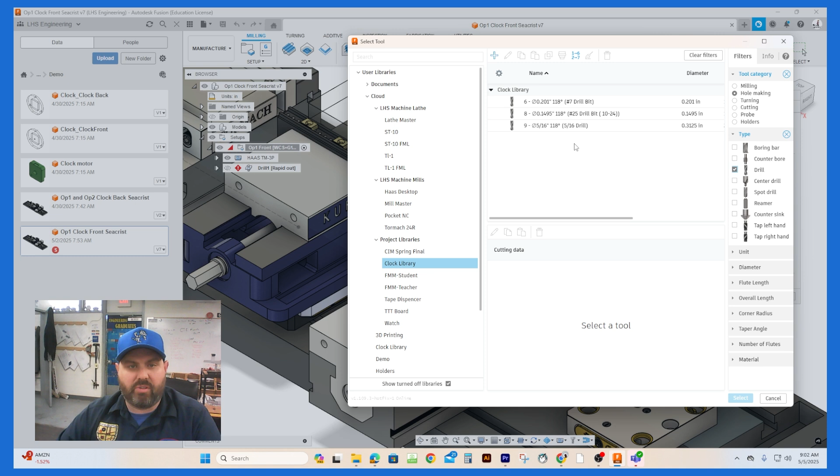But if we had a large library, we could actually use filters here on the right to limit ourselves to only the drills, and that would limit us down to the 3 drilling drill bits. For this center hole, we are actually going to use the 5/16 drill bit, tool number 9. So we go ahead and hit select. Notice it's acrylic plastic at 4,000 RPMs. If there were more listed here, we'd have to make sure we choose the correct material that we are cutting, but we only have acrylic for this one.

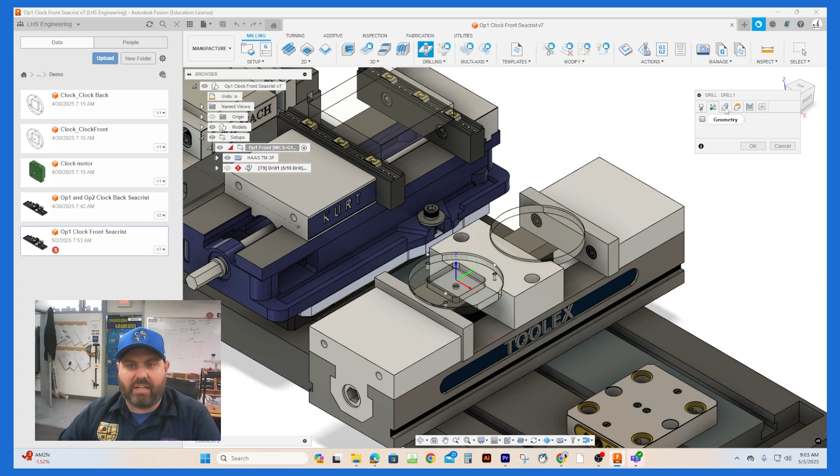The second tab we do not need to work with because we're not doing multi-axis. The third tab is geometry, so we need to select the hole we want to drill. I'm going to zoom in and grab that hole, so it now knows where I want to do the hole. I don't need to click any of these other icons for this one hole we're drilling.

Heights, now this does matter, because right now it is going to start drilling at the top of the hole, which is already way down inside the material. We want it to start drilling at the top of the stock, so we are going to switch from top of hole to top of stock, and you can notice that this gets longer. Then bottom of hole, and then we are going to hit drill through.

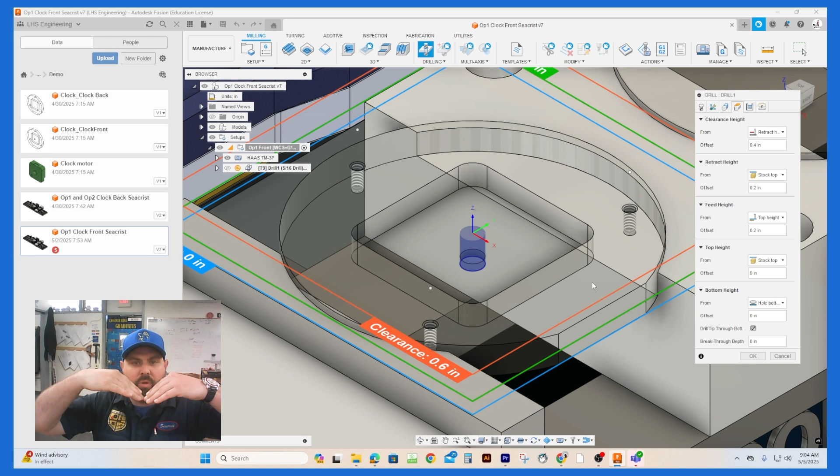Tip through. The drill tip is actually angled like a V, and so it'll stop at the bottom of the tip. We want that whole V to go all the way through, so that's what drill tip through the bottom will do. If we look here on the side, you can see that the drill is coming all the way down through the bottom.

Then we're going to go ahead and go over to cycle. We're going to rapid in, rapid out, we're not drilling that deep. And linking parameters, we don't need to adjust at all. So we're going to go ahead and click OK.

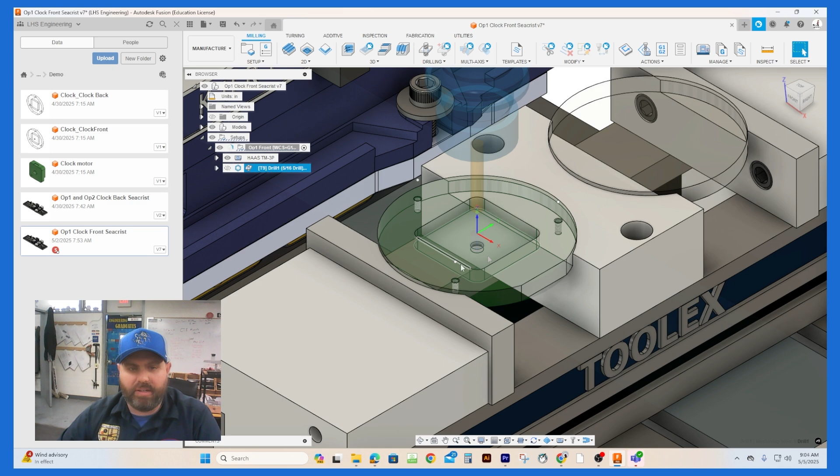We're going to see that it's going to take a second to process. It's processing right here, and once it's processed, we can go ahead. Now that we're done, we can go ahead and hit simulate. We're going to hit play, and we're going to see the drill bit come over, come down, drill the hole, and come back up. So we can exit the simulation, and we've now done our first command, which is drilling.

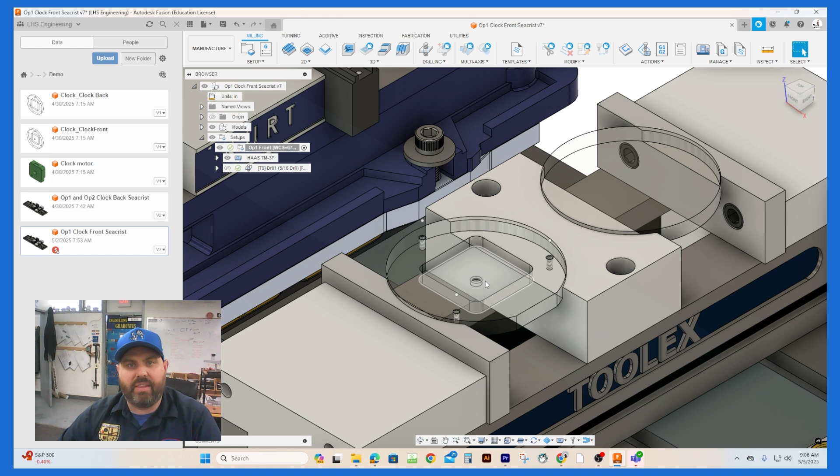Our second command is we are going to remove all the material from this square, and there are 2 things we have to understand. We are going to try to remove the material as fast as possible with no care for how the finished bottom looks or the sides. So what we're going to do is remove everything but 20 thousandths on the floor and 20 thousandths on the sides, and then we're going to come back and clean both those operations up.

So adaptive clearing, let me close this so you can see the titles. This is adaptive clearing. This is what is used to remove a large amount of material.

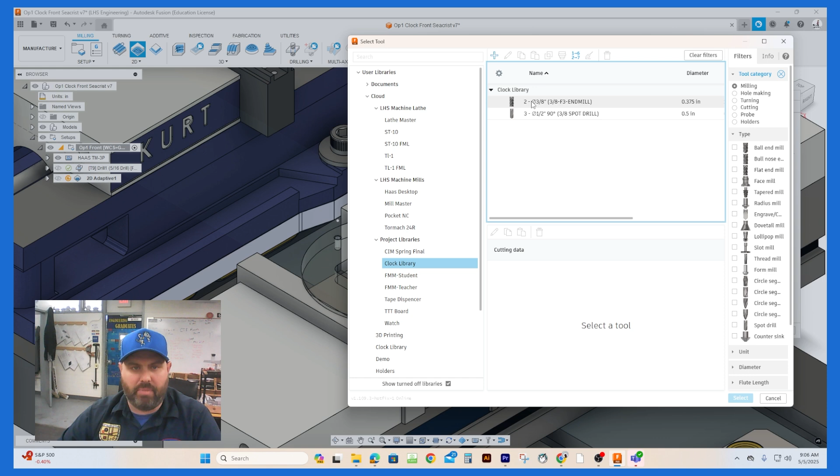So we go ahead and click on that. We're going to select our tool just like we did before. This time we are going to use an end mill, specifically tool number 2, the 3/8 end mill, in acrylic plastic, and we're going to hit select.

We do not need to work with multi-axis. We're going to go to geometry and select this ring at the bottom of our pocket, and it's going to highlight everything in blue, meaning it's going to cut everything out. We're going to go here, we don't need to change any heights. We told it how deep by selecting the ring at the bottom.

Passes, we are not going to change anything. We're going to leave the material to be left on the walls and the floor at 20 thousandths, and our optimal load at 15. Under linking parameters, we don't need to change anything. So we're going to go ahead and click OK.

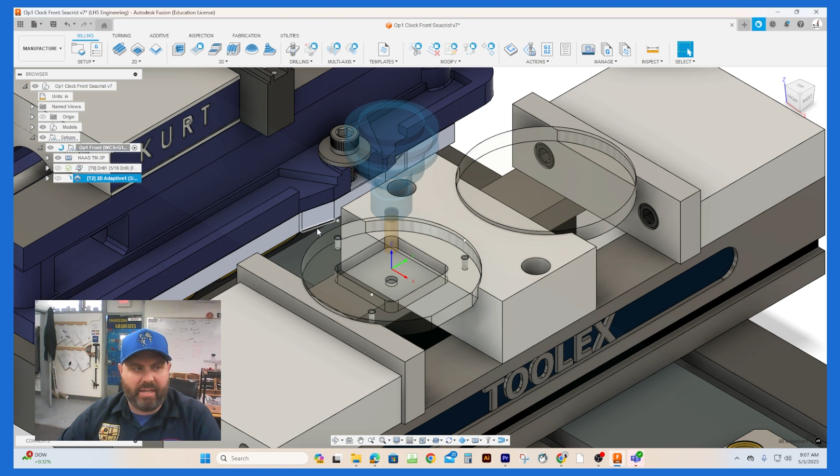And it's going to take a moment to think. And there is the process. It's going to spiral in to the bottom and then start moving its way out, cutting away all the material, but leaving a little bit on the bottom and a little bit on the walls.

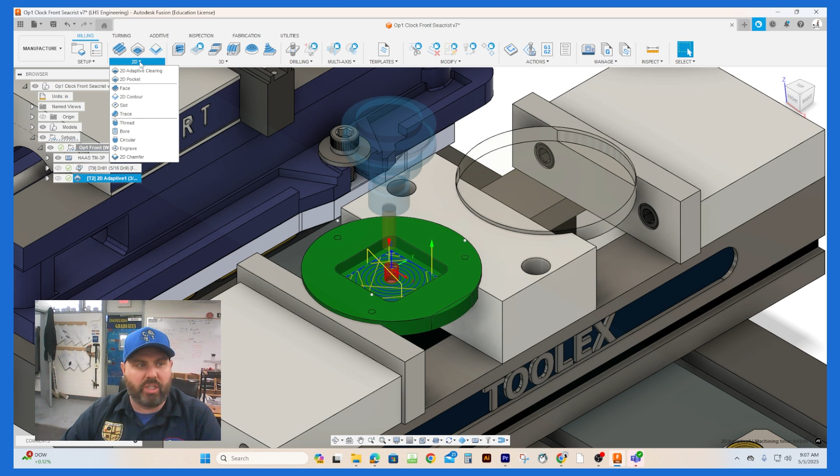Now that we have the material out quickly, we're going to go back and clean up the bottom and clean up the walls to the exact size we want. And to do that, we are going to use a pocket, specifically a 2D pocket.

So we're going to click on 2D. In the window, you notice that the number 2 tool, the 3/8 flat mill, was automatically populated in here. It always defaults to the last tool we used for a similar operation.

So before we started with the drill and then went to an end mill, you can't adaptive clear with the drill, so we had to select a tool. But now it will stay on this 3/8 end mill until we do something that requires us to not use the 3/8 end mill. So we don't need to adjust this.

We don't need multi-axis, so we're going to skip over to geometry. We're going to select the exact same geometry as before. And then we're going to move on to heights. Once again, we're changing none of the heights because the geometry we selected is already on the bottom where we want the floor of our pocket to be.

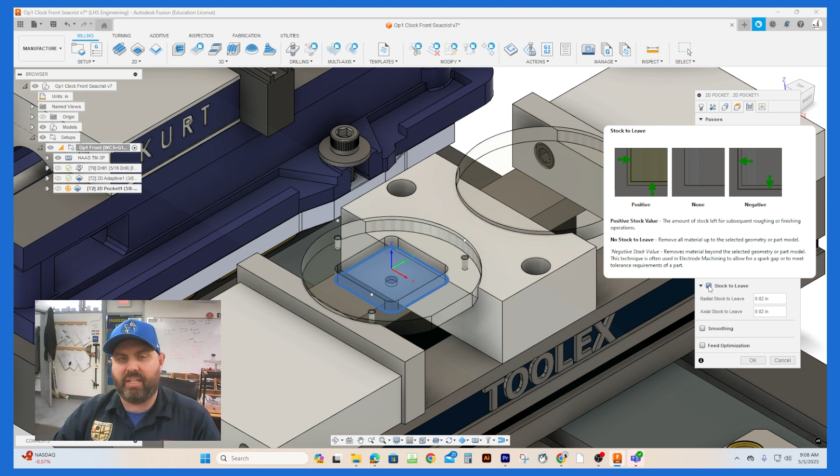Under passes, there's nothing to do here other than to check turn off stock to leave. We did that—we wanted stock to leave in the adaptive clearing. Now we want to cut to the finished size. So we're going to click there.

And then the only other thing we're going to change is on this ramping. We do not need to run it at a degree of 2. We already cut all the material out, so we can come down at a much faster rate. So what we're going to do is change this to a degree of 10, and the spiral in will be much more aggressive, which is fine because the material has already been removed.

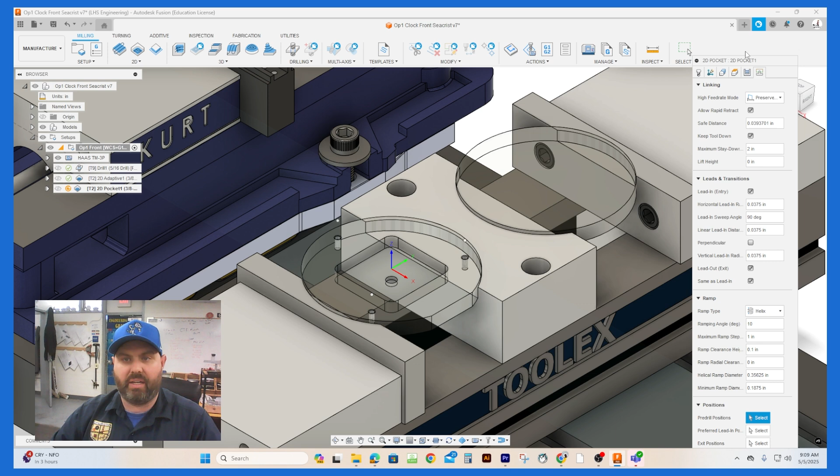And if we just slide this up a bit, we can go ahead and hit OK. And you're going to notice that red spiral is a much higher helix, and it's going to cut to the final size. So now that we have 3 operations set, we're going to simulate again.

This time we're going to click on the very top. That will allow us to select everything. We're going to hit simulate again.

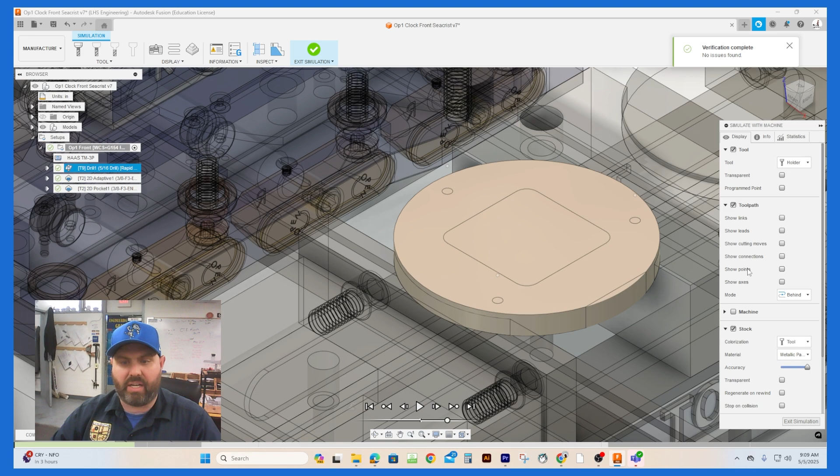Here it is. I've turned the machine off. If I moved it to here and zoomed out a little bit, I can turn the machine back on and see it. And we're going to go ahead and hit play.

And if I zoom out a little bit, it's going to start with the drilling operation. And then it's going to switch tools to the 3/8 end mill, and it's going to spiral in and open up the pocket, leaving material on both the floor and on each wall, 20 thousandths to be specific. And then it's going to switch, and cut the 20 thousandths off the bottom and finish the walls exactly to size.

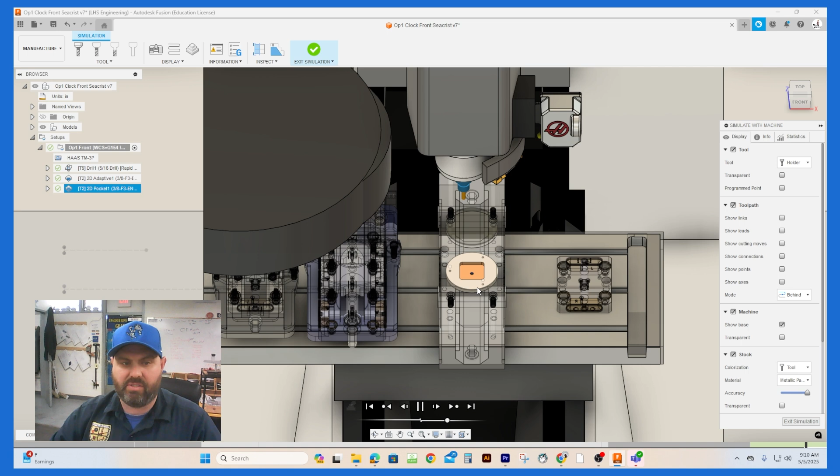And then we're going to exit the simulation because we're not quite done. We still need to do 3 more things. Let's go ahead and click somewhere else to get rid of the machine.

We need to cut this flat on the bottom, and then we need to drill these holes and then tap these holes. So we're going to start with the flat on the bottom. This is also going to be done with the 3/8 end mill.

So let's go ahead and go to contour. Contour means we're going to use the side of the cutter to cut along a flat like this. It is automatically defaulted back to the 3/8 end mill, so we don't need to change that. Multi-axis we skip. Geometry is our next step.

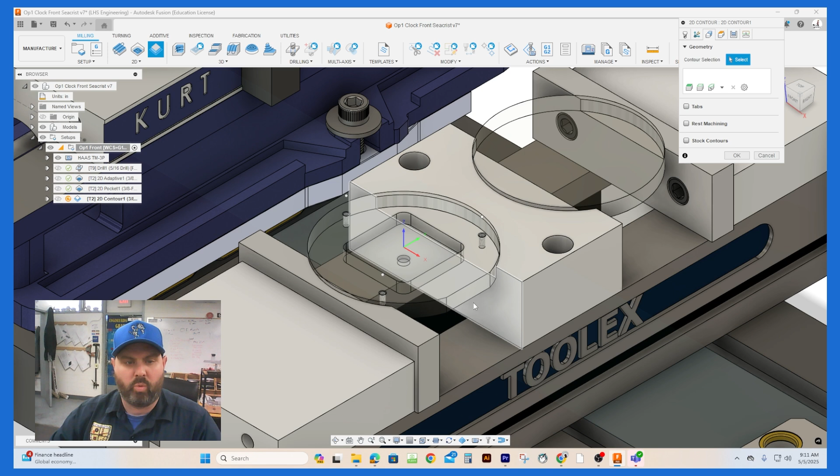We are going to click on this ring on the bottom. Now, we do not want to go all the way around like it has it right now. That means it would cut through our jaws and our piece would become loose. All we want to do is cut this single line.

And to do that, we are actually going to double click on closed chain number 1. And we get this chain box. We are going to switch from closed chain to open chain, and that is going to select only one line.

Now this red arrow is very important. It should be on the outside because it basically means the cutter is going to cut on that side of the line. If you click it, it switches to the inside, and it'll cut on that side of the line, which is not what we want. So I'm going to click it again, move it back to where we want. I'm going to click OK.

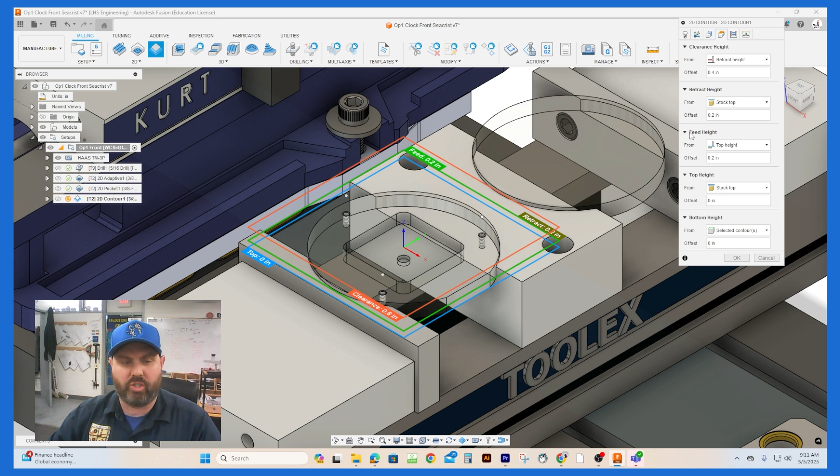I'm going to my 3rd tab. Now on this tab, we do have one adjustment to make. We have selected the bottom edge of this plastic. We want to actually move the cutter so the very bottom of the cutter is going to run along that edge. It can leave a little bit of material behind if our settings are not perfectly correct.

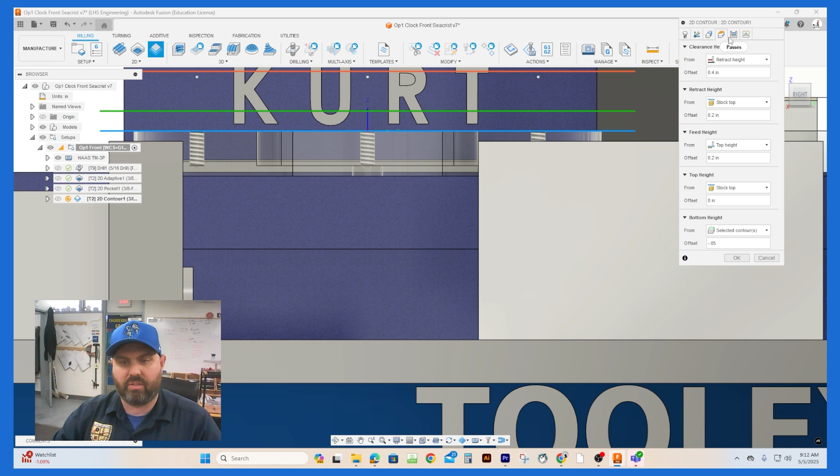So what we're actually going to do is we're going to tell the cutter to actually go down below that edge by about 50 thousandths so that we're using the side of the cutter and we make sure we get a nice clean edge. So under offsets here, we are going to select -0.05, and you're going to click on to the next tab, which there are no adjustments, and then on to the last tab, which there are no adjustments, and I'm going to click OK.

And if we kind of come up, you're going to see that the blue line is below the side of our part. And if we look from above, we can see our lead in to cut that flat and our lead out.

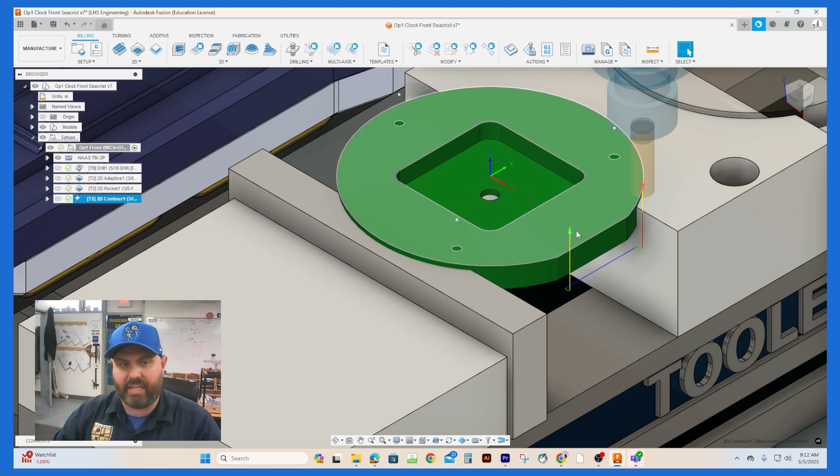We're now down to 2 more steps. We've got to drill this hole and then these 3 holes, and we also need to tap these 3 holes. So let's move on. We're going to do drilling.

And this time we do need to change the tool because we're going to be drilling with a number 25 drill bit, I believe. So we're going to go back to our tool library. And we are looking for the number 25 drill bit, the 10-24. So this is the pilot hole that you need so that you can then tap to a 10-24.

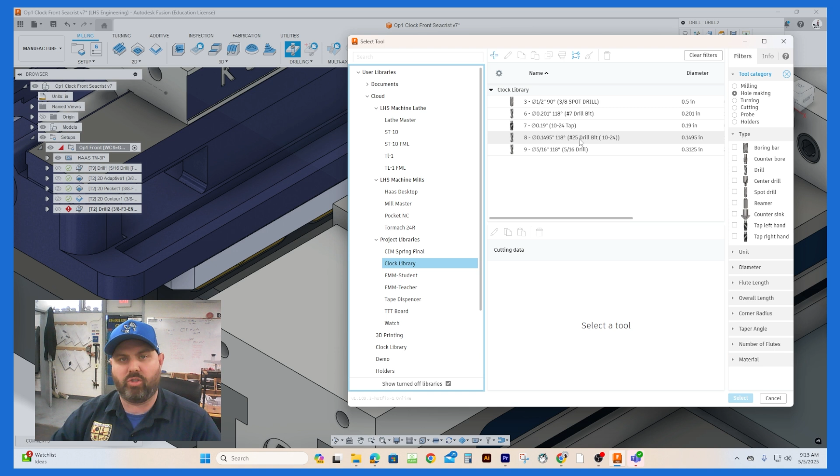So we're going to click on the number 25 drill bit. It's also in acrylic, so we're fine there. And we're going to select OK.

Skipping the multi-axis tab, we're going to go to geometry, and we're going to pick one of the holes. Now, we have 3 holes to do. We can select all 3. That's not a big deal. But we can also hit select same diameters.

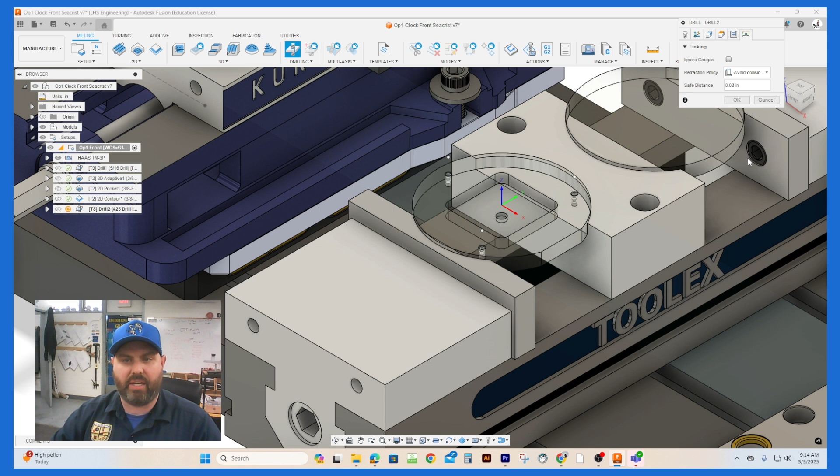Moving over to heights, we are not going to adjust anything other than the top of the hole. We're going to go to the top of the stock. And then under rapids and these things, none of these need to be changed, so we just go ahead and click OK. And you're going to see that it runs around and drills those 3 holes.

Our last step is we need to tap these 3 holes, so we have to make the spiral for the screws to screw into with a tap. So this is fundamentally a drilling operation, so we're going to click drill.

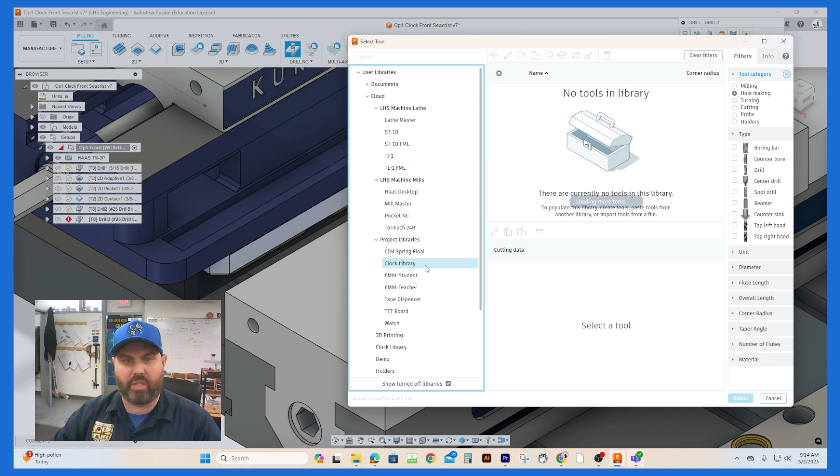We're going to switch to the tap. There is only one tap in our tool library, which is the number 7 10-24 tap. It runs at 500 RPMs because it has to match speed and up and down movements, and we want to keep it relatively slow so that those movements aren't too rapid. So we go ahead and hit select.

And then we're going to come over to geometry. We're not doing multi-axis. We're going to select the same set of holes using the same method, selecting all the same diameters. Now, because we've selected that it's a tapping hole, it knows that it's a tap, so we'll show that in the next tab.

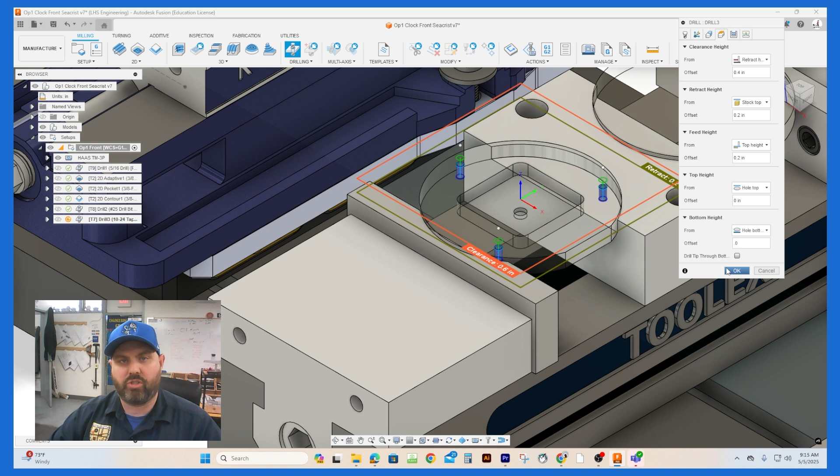For tapping, we have to be aware these are called blind holes, where the tap goes in and there's a bottom. Taps are extremely fragile, and if they hit bottom, they can break very easily. Also, if a chip or a little piece of plastic falls to the bottom, and the tap tries to crush that, it can also break. So we're going to leave a small area at the bottom, about 30 thousandths, so that if any chip falls in there, we don't have any broken taps.

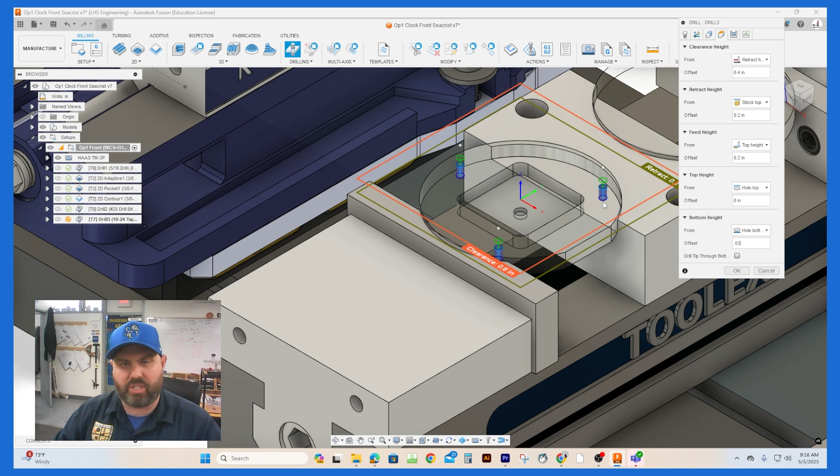So what we're going to do is offset from the bottom 30 thousandths, and you saw it move. I'll show that again: zero, and then if I put in a 3, it comes up just a hair. That leaves us a little bit of space. Now on to the next tab.

So in the cycle, notice it says tapping. Because we selected a tapping tool, it automatically knew we wanted a tapping operation. If for some reason it isn't set to tapping, we either need to check that the tool is set as a tapping tool, or you can override it to say it is tapping. And then lastly, linking - there is nothing in the linking parameters, and we can click OK.

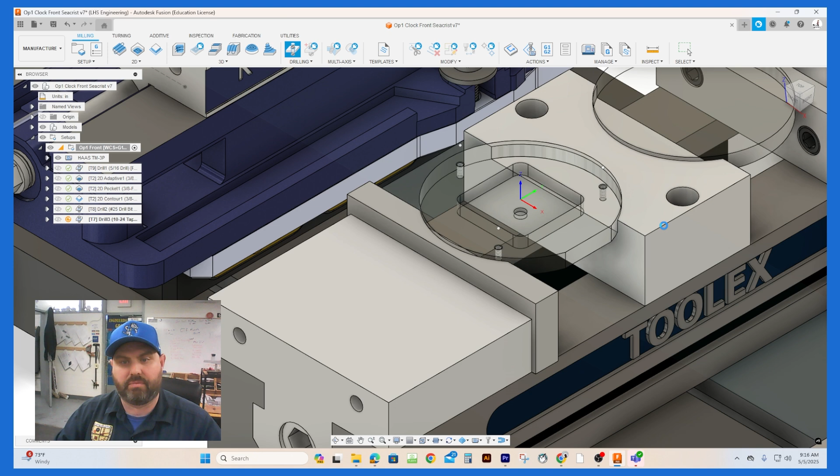And there is our tapping operation. Now if we go back over to this list, these are all our operations to complete the clock front. If we click on the top and then move around and zoom out, we can simulate the whole thing from start to finish.

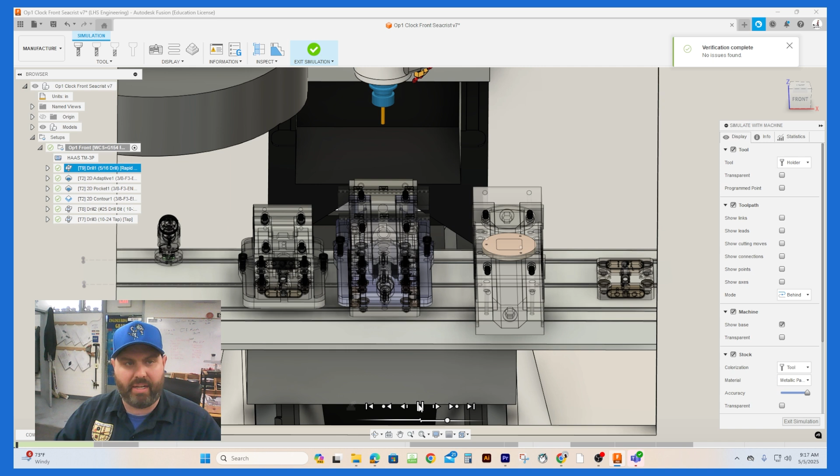We can go ahead and hit play, and it's going to go through all the operations to show us what we've programmed. I'm going to speed it up just a hair. Now, while it's doing this, there it goes - now it's doing the 3 drilled holes, now it's doing the 3 tapped holes, and the part is done.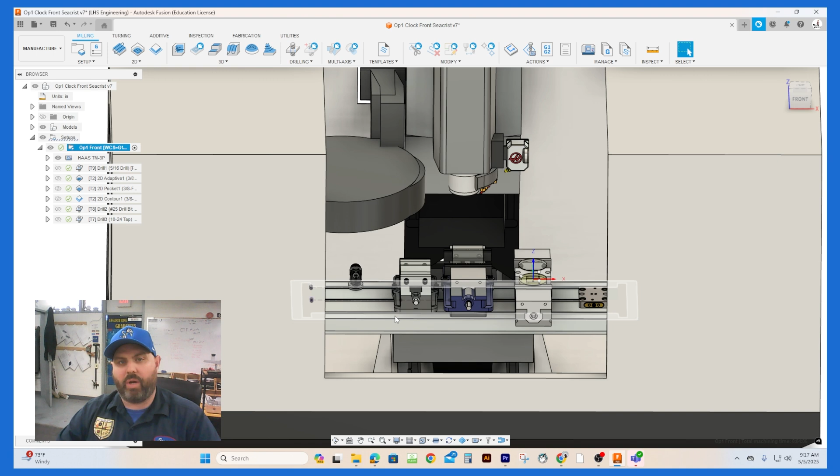We'd now be confident to run these through the simulators in the front of the classroom. But before we do that, we have to do what's called posting. Posting is where we tell it what machine we're using, and we actually have it write the G&M code - basically converting this from Fusion to G code.

So we're going to click on the G1, G2, which is our post. This should be your default setting. If it's not, please get my attention and I'll come help you. The post processor should be the same thing. Our code should automatically generate, and our comment should already generate with our last name.

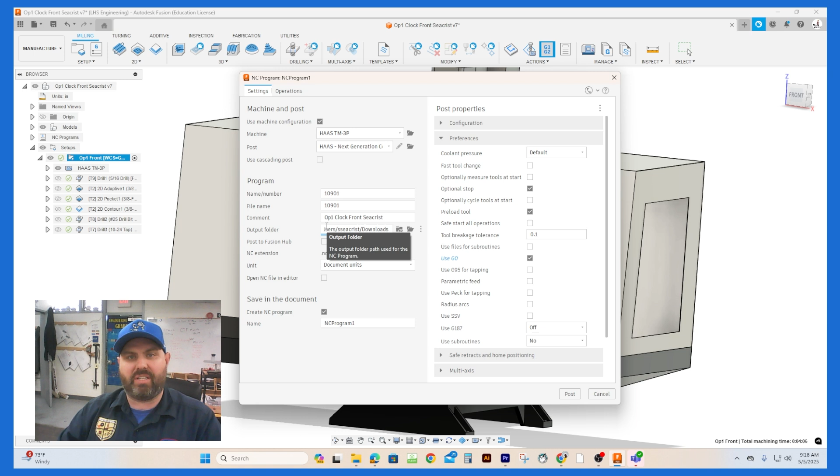The last thing you need to be aware of is this will save it to some deep, dark place in the computer that is hard to find. So I highly recommend you click on this and switch it to the downloads. Ultimately, you're going to be moving this onto a flash drive and then moving it up into the front of the classroom. So the best place to go is downloads because it's easily findable. And then the rest of this is just fine.

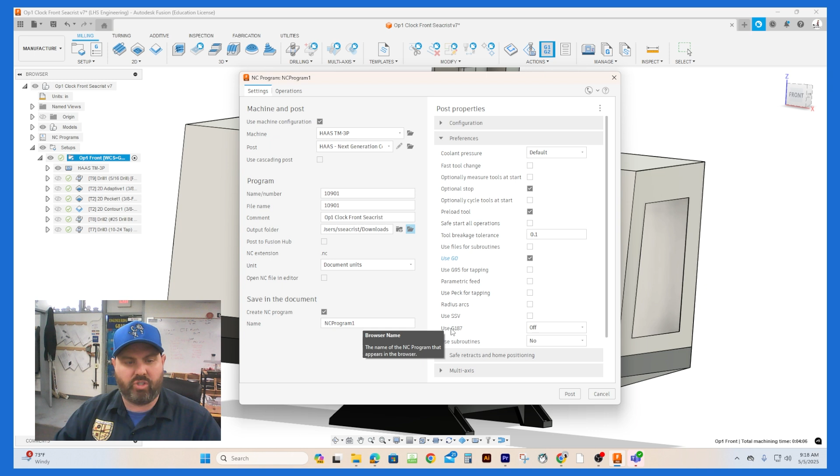We do have to make one change here on the post processor. You need to make sure you check the use G0 box right here. If you don't do that, we're going to have a problem when we get to the machine. You have to make sure this post processor outputs G00s, not high feed rates.

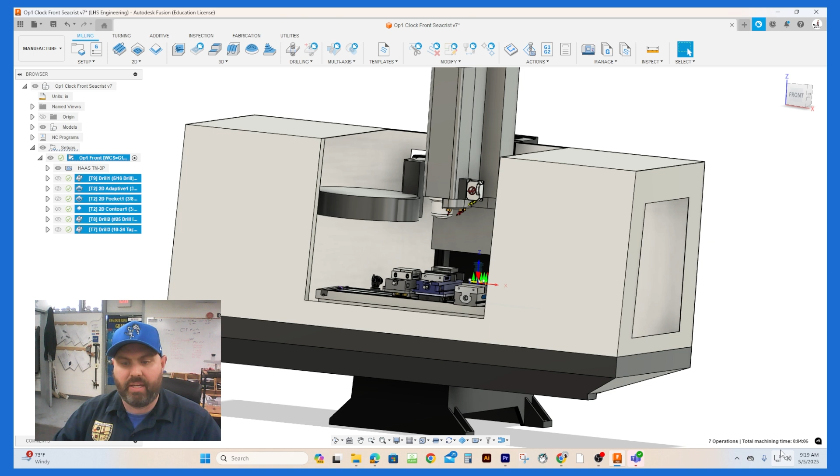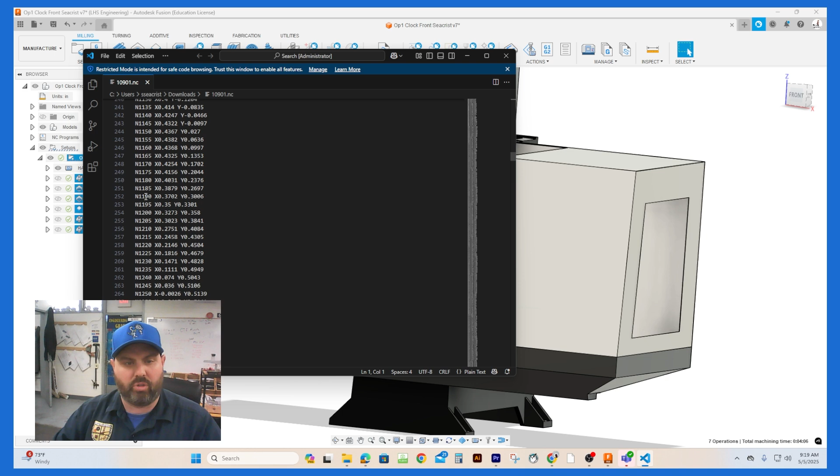Our last step is to hit post, and then it's going to write the code. I'm going to click on view NC to show you the code. You'll normally get a window that pops up asking if you want to download this reader - I normally just select notepad, it's a faster way to get it up. Here is the code that's generated, and it'll tell us the machine, tell us the project with our name, and then it does drilling, adaptive clearing, and if you kept scrolling down you'll see all the other operations.

Now, for the clock back, op1, it's the exact same procedure. You don't do any of the drilling or tapping commands - you do everything else the same way. I will have another video that shows how to do op2 of the back in episode 5.